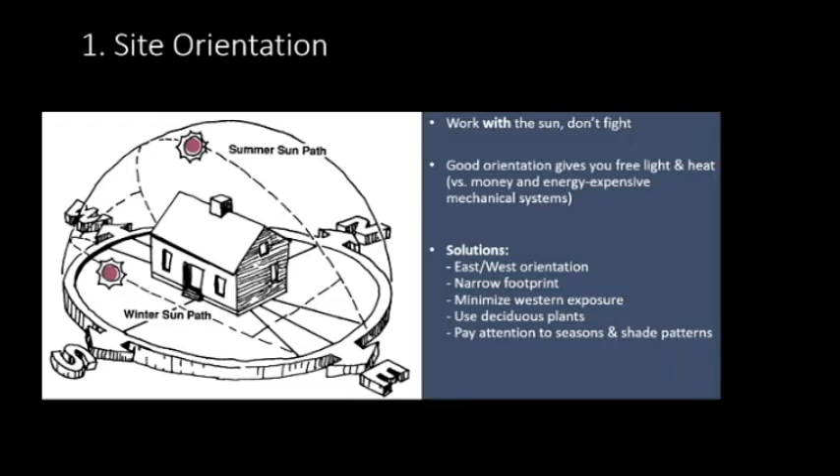One of our more interesting projects was after the Witch Creek fire, which burned up in the San Pasqual area. The San Pasqual tribe asked us to design a cultural center for them. Taking the passive solar concept further, they wanted to orient it so it's completely oriented directly to true north.

On the solstice, they would have the north light coming through a circular skylight, hitting the chimney. That was a teaching lesson they could bring their youth in for, to teach them about the cycle of the sun and its orientation. This overlooks Lake Wohlford, a very interesting design, and we used insulated concrete form walls for the structure.

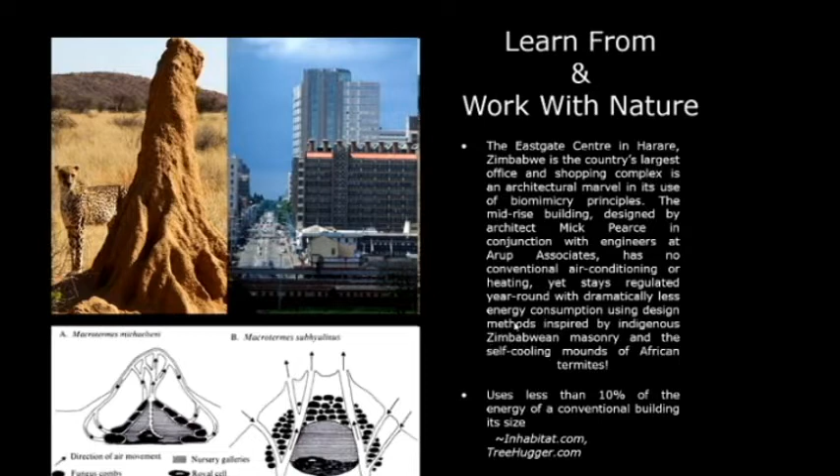Then there's the idea of learning from nature. The building on the right is a mid-rise in Harare, Zimbabwe. The architect used the concept of biomimicry, following how termites use their towers for passive cooling. Air pulls down from tubes on the roof, and this building uses less than 10% of the energy of a conventional building, so no air conditioning is needed and very little heating. It's a really interesting concept of biomimicry, drawing on the knowledge of nature and learning from those lessons.

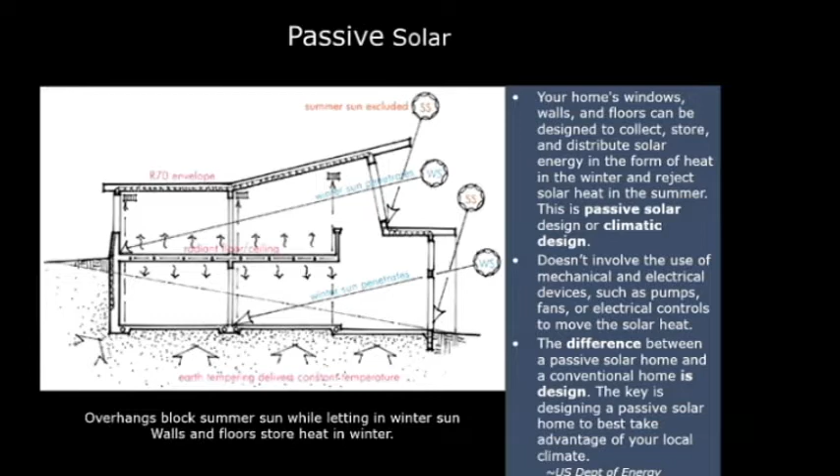Then there's the idea of thermal mass - this is when you have a solid surface inside an insulated shell that helps mediate those temperature swings. This was the Dunham Kidwell house in Jamul, up near Rancho Jamul.

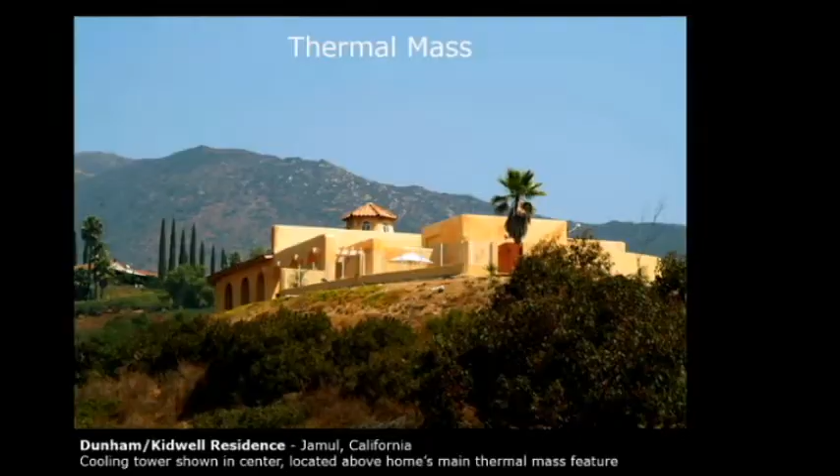The interesting item here is the cooling tower you'll see at the top. It looks sort of traditional with a Spanish tile roof, but underneath it was this 10-foot diameter boulder - a giant granite boulder they really wanted to integrate into the center of the building. This provides wonderful thermal mass because it keeps the temperature of that rock about 65 to 66 degrees all year round, since it's connected to the earth.

You can see on the right-hand side we tried to use bamboo flooring, and it's a straw bale structure - one of the first ones where we did large workshops, bale raising workshops. The cooling tower works above and has a large fan, so in the summertime we reverse it and the heat is drawn up, naturally cooling the building.

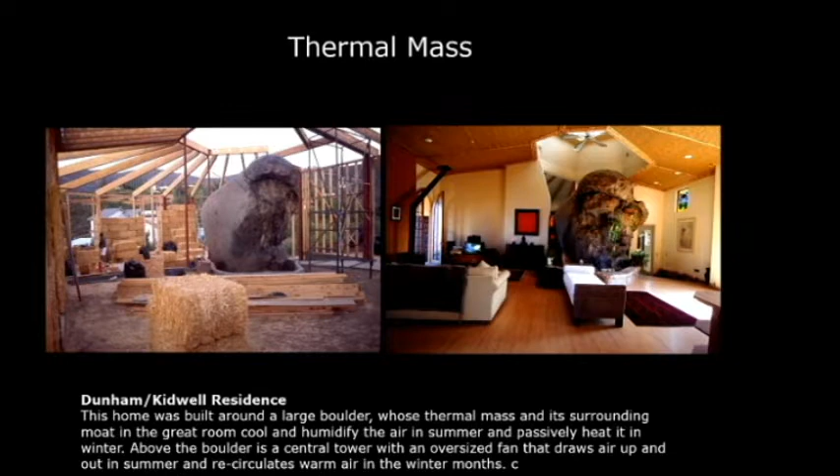This is a tradition from the Middle East - they did this a lot in early buildings. In the winter, they close those windows in the tower and it recirculates down over the boulder, helping bring the warm air down in.

And then I understand you had a series on water conservation, but this is just the idea of rainwater cisterns, catching that rainwater when we do have it, which is not very much anymore here. I installed a 1,100 gallon one in my house in Kensington. If we get 2 inches of rain, it fills it up completely in one downpour. So it's pretty great. And then I use it on a few trees during the dry months.

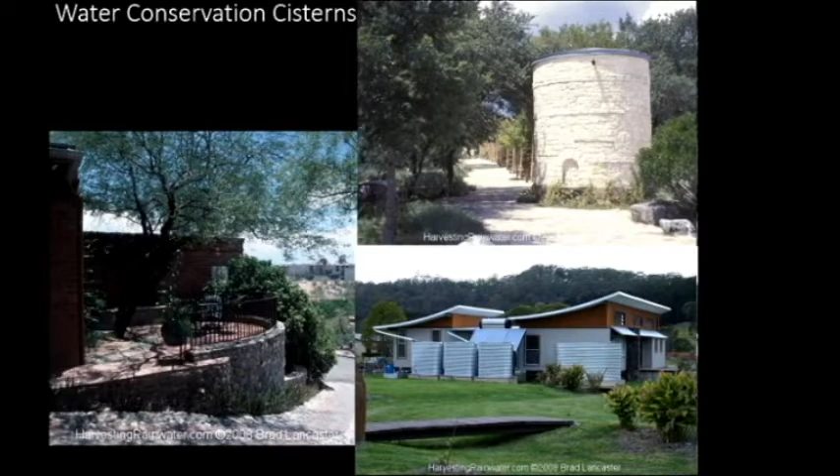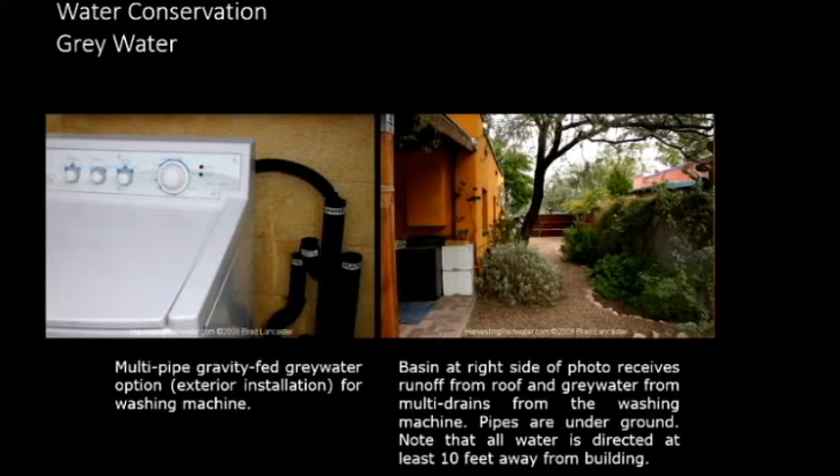And then a gray water system, using that water. This system has a couple of different tubes going to different trees so they can circulate that. You can also just have it passively run through different areas of your yard. It's a great way because people are always using laundry, so if you use the right detergents, it's a great way for reusing that water.

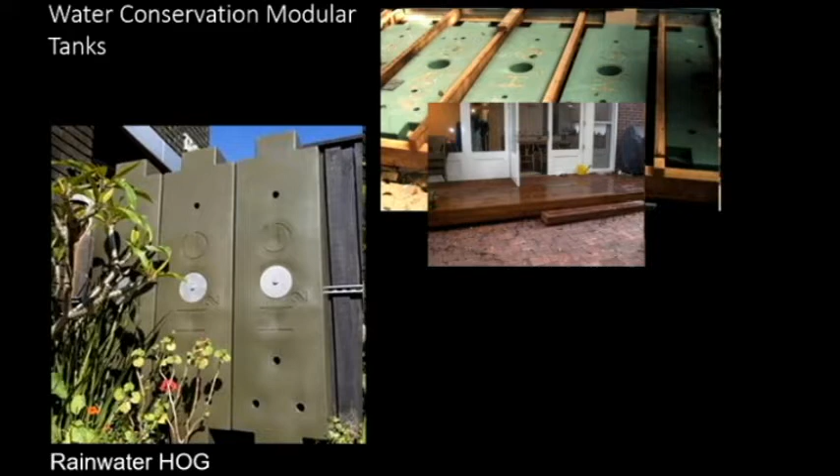And then alternative materials. Another interesting project we did in Tecate, Mexico for the foundation at, it's called Las Piedras.

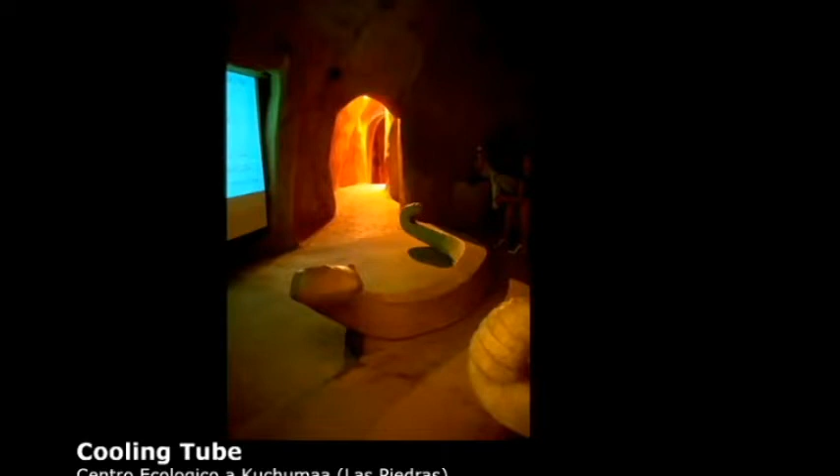So one of the fun buildings is a little meeting room that has audio visual. They go through these tunnels and the kids can climb. And then a local artisan made snake benches.

But under the benches, we have cooling tubes. I think Rob mentioned this in his presentation, but the cooling tubes travel under the ground and passively cool the air. And then we have a high window or a vent up high. So there's no air conditioning or ventilation, but that helps pull that cool air through the structure in the summer times.

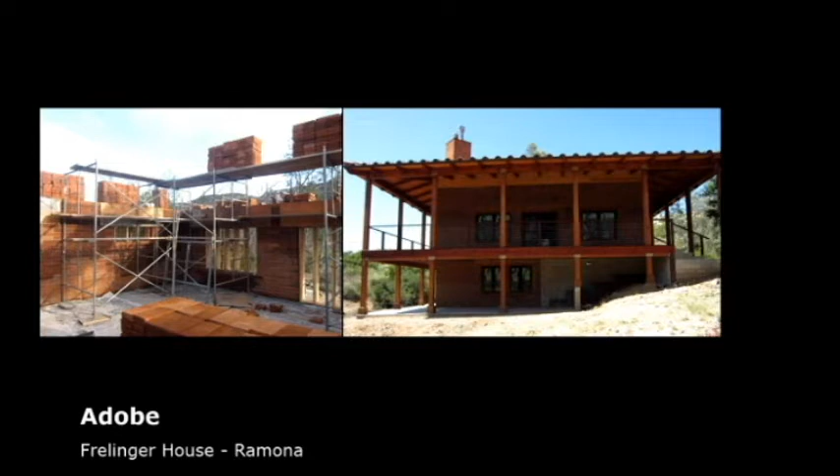Those are some of those fired adobe blocks early on, and you can see the blocks going up. It's more labor intensive than straw bales, which are a large module but a very locally sourced natural material.

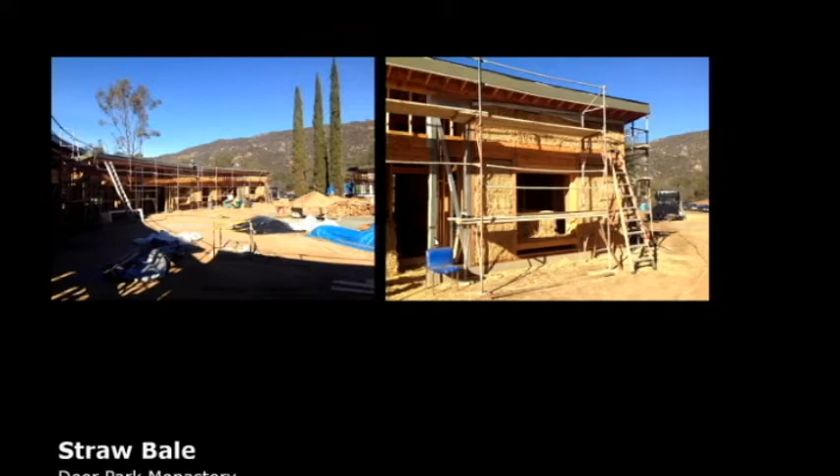Their founder, Thich Nhat Hanh, is a famous Buddhist author and practitioner. This was his little building where he would stay when he came.

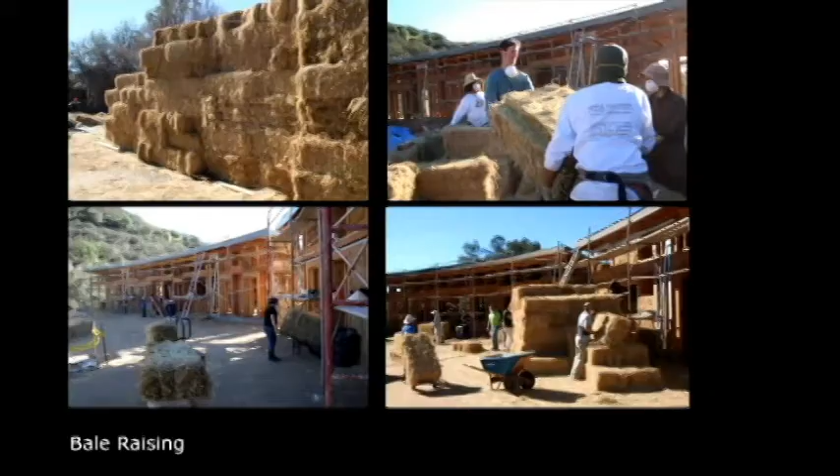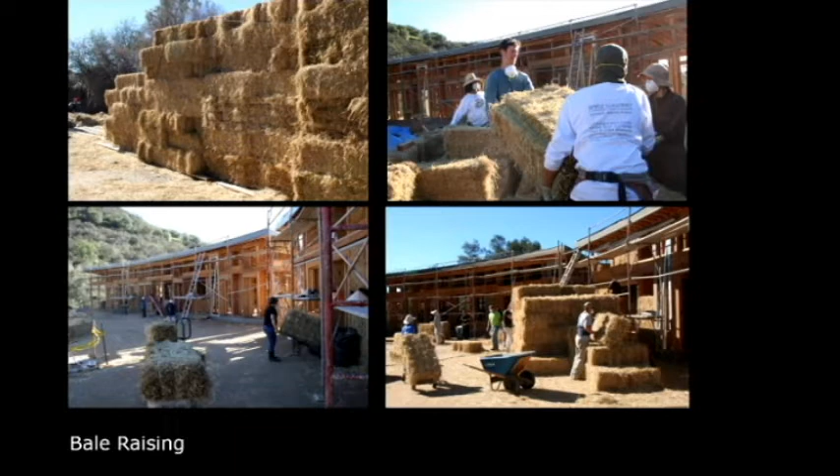One of the real fun things about straw bale construction is the bale raising. I related it to an Amish barn raising, where a bunch of people come together and help put up the bale walls, and then they take authorship for the bales.

This is rice straw shipped down from Northern California, because the Buddhists eat a lot of rice and feel a connection to the rice straw, though a lot of it comes from Brawley and the inland valley. You can see different people working. The bale on the right side is notched so it fits near one of the posts, and people are moving the bales around. They're about 55 pounds each, and they put them into place.

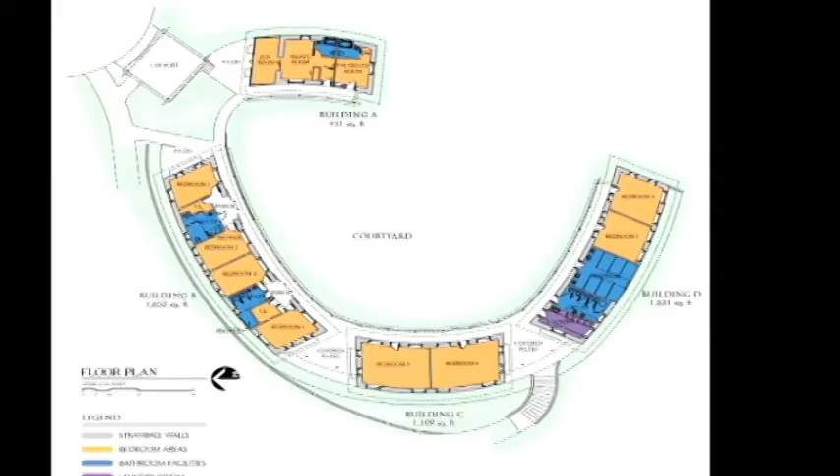Then we come back and plaster the walls. They're again super insulated. They were very cold in little uninsulated shacks previously, and now use very little heating or cooling as necessary.

They built this whole structure with volunteer labor. One of the contractors or retired people that volunteered said he screwed 100,000 screws putting together all the metal framing for this structure.

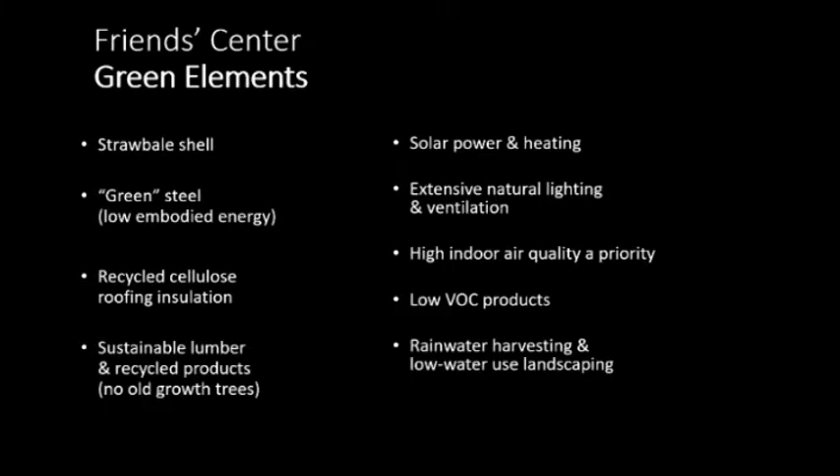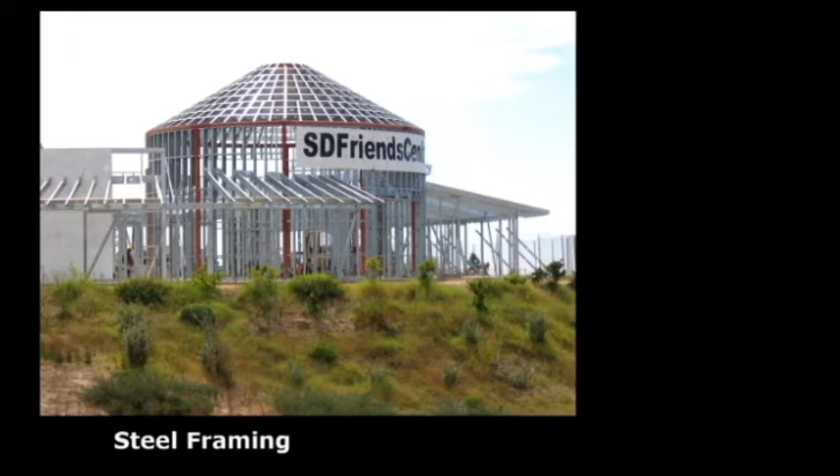This is a picture during construction. You can see the metal frame. It was very strong - this is the only metal frame we've done, but they didn't want to use any lumber, just the people that are involved.

Then a couple of projects that are net zero, meaning the building, mostly through the PVs - the photovoltaics - creates as much energy as needed for the home as is used by the home.

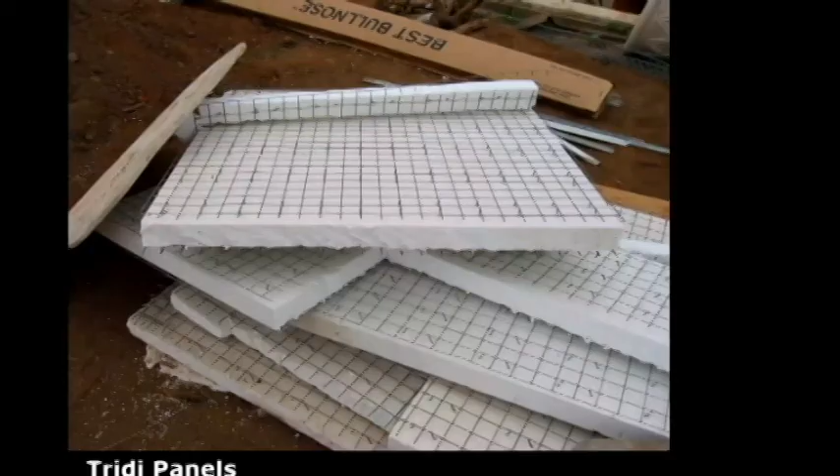These are some of the panels - they're 4 inches of styrofoam with a wire mesh inside and out, then wired together. They come in sheets about 12 feet long by 4 feet, so if it's a square building or straight walls, it goes up very quickly.

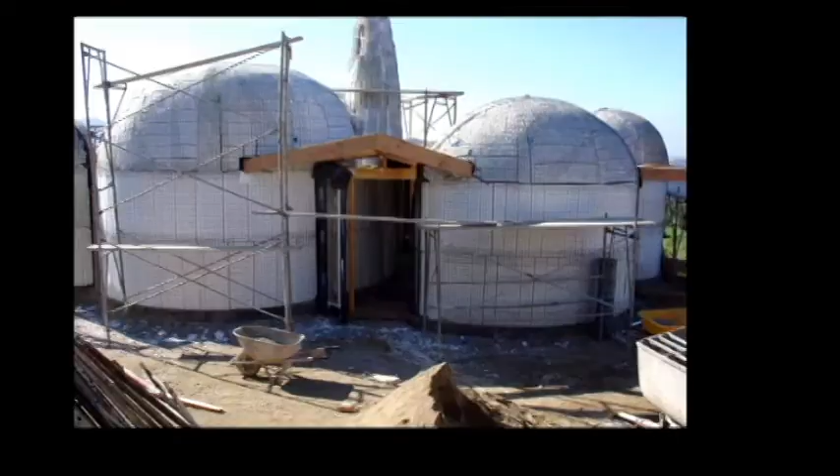But if you create domes like we did in this design, it's not as quick. These are the domes - the husband wanted sort of an adobe domed feel, so on the north side we used these Tridi panels and then plastered them. For the walls, you use the Tridi, and for the domes, and then it's wood framed in between.

This client is an organic exotic gardener, so they have about 2 acres of all organic vegetables and fruits.

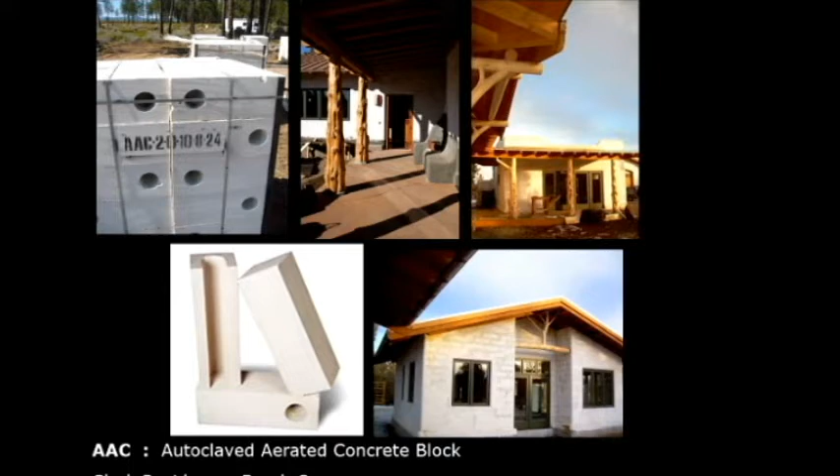Another interesting building material we've only used a couple of times is autoclaved aerated concrete. The concrete is mixed with aluminum and superheated, so it has all these little air pockets. It makes it very brittle, but put together with rebar, and you can see the core uses a lot less cement than the other blocks we use. This one was done in Bend, Oregon. Again, super insulating, wonderful thermal mass, but it hasn't become as popular, and the only place we know that makes it is in Texas, so there are issues with shipping and the cost of doing that.

One of the fun things, she had junipers on her property in Bend, and these are some of the juniper trees that they debarked and sandblasted. We were able to use them for the structural columns—they're almost like they're carved, really beautiful. They also have a lot of lava rock, so we integrated that, which you can see at the bottom. And then there's a couple of finished pictures of the house and a sort of pool house on the right side. All native landscapes she used around the buildings.

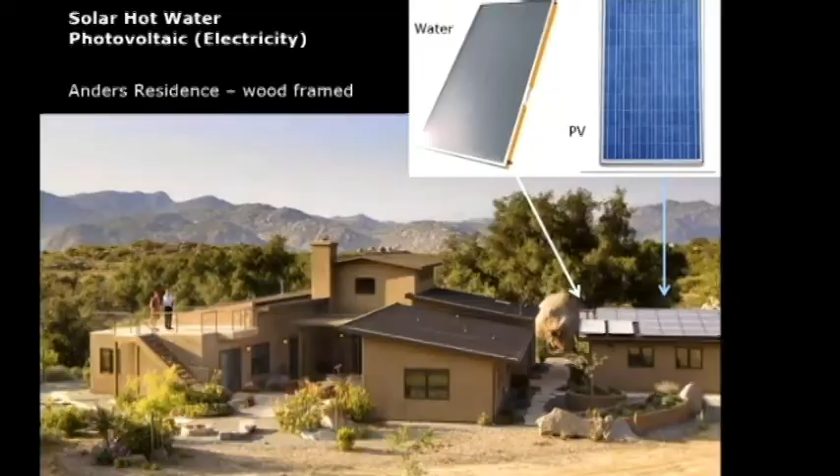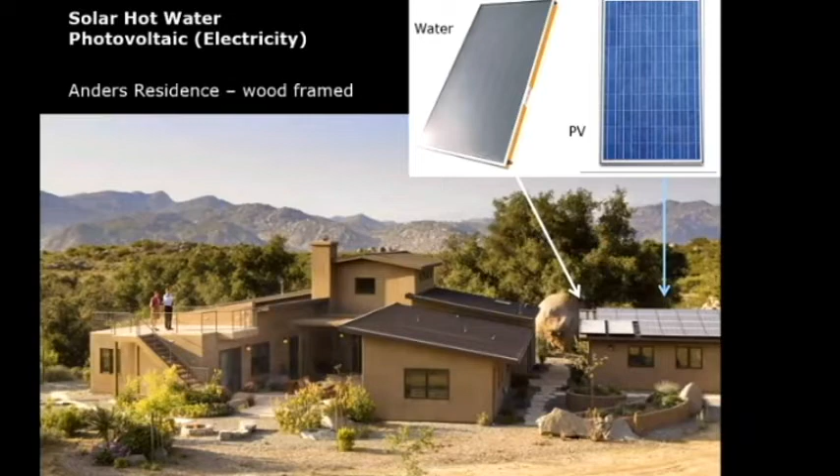This is the Anders residence. It's stick frame. He's an energy professor at USD and started out wanting to do straw bale, but determined it was going to cost a little bit more, so we went with 2x6 construction on this building. It has a central courtyard facing south, a couple of wings, a high great room in the background with high windows creating that cooling tower effect. You can see the solar and hot water panels, and because of the orientation and super insulating, this one also uses very little heating or cooling, and it has a beautiful rooftop deck. This one is off Wildcat Canyon, and was another fire rebuild, I think after the Witch Creek fire.

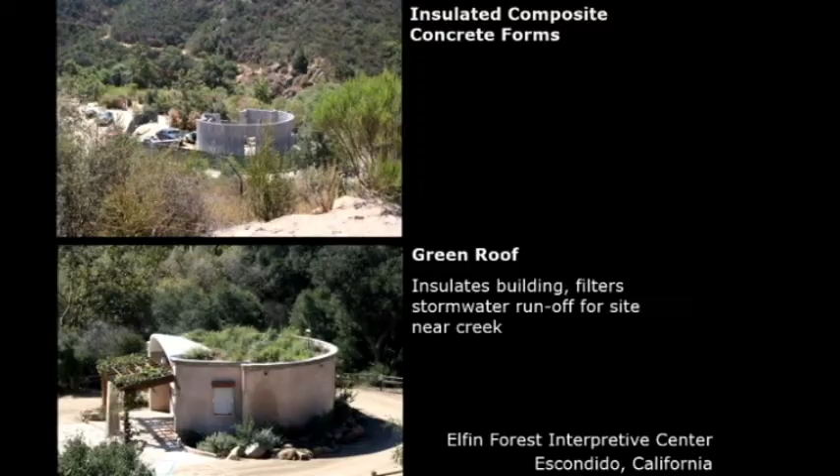This is a detail of the ICF block. It has these little cells, which are 6-inch shells filled with rebar and concrete, and then the blocks are laid on edge or laid on side, vertically or horizontally.

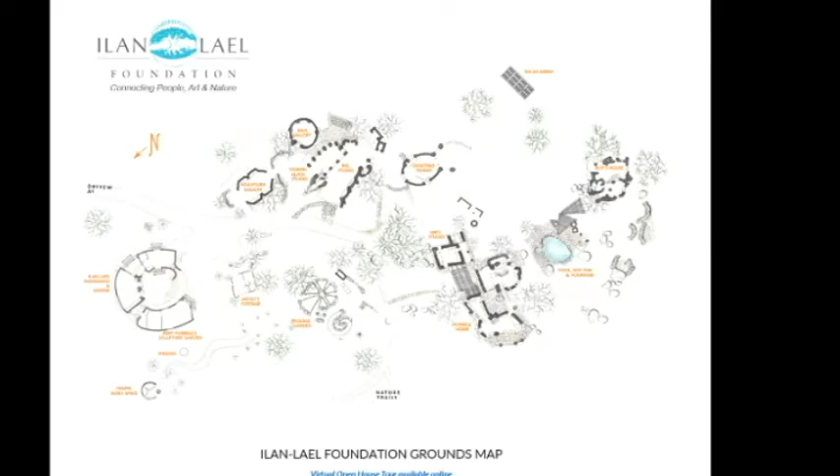And then there's a picture facing east, with reclaimed plaster - that's the roof deck up on top - and reclaimed cedar beams and some copper waterproofing flashing up above. There's a little detail of the framing and how that arch connects to a large beam, and then the flat ceiling traditional framing of the structure below.